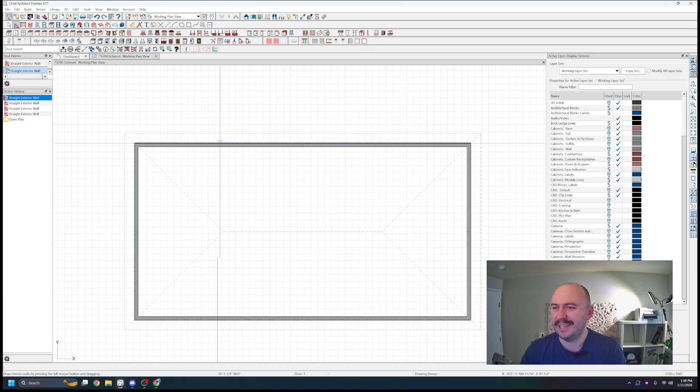First and foremost, I'm using Chief Architect Premier X17. We're not worried about the rest of the house, we're just focusing on the kitchen and living room that is directly adjacent.

Just getting in my walls. So here we have the kitchen. Let's place a couple windows for reference. We have our front door, front window, we have our garage door, and we're going to put this hallway in, more so for dimensions. We know the hallway, we can guess based on pictures how big things are.

So let's pull those reference images up. If I had to guess, I'd say this room is 12 feet across, maybe.

So we got a 36-inch front door with a couple inches on the right side. Looks like based on the 3-gang switch box there, that's about 24 inches between the door and the window. And I'd guess, it's hard to say, could be a 6-foot window, could be a 7-foot window. We're not trying to be perfect here. Of course, if we had perfect dimensions, that would be ideal, but since this is an on-the-fly design, we'll make some assumptions.

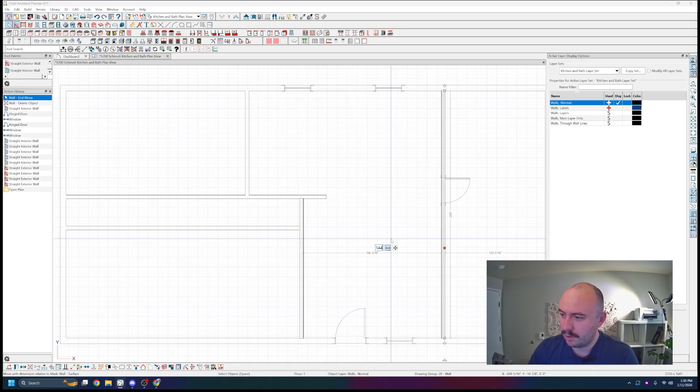Let's get this door over here in the corner, get the swing right. This 6-foot window, it's pretty dang close. I'm dragging our half wall. If I had to guess, it's 48 inches based on the tree, something like that. And I'm assuming that this door lines up with the hallway.

Okay, so we got our living room, we'll put our fireplace in there eventually. And now this kitchen area, well, let's go look at our pictures.

You can usually tell by the cabinet sizes roughly how big a space is, if they're standard cabinet sizes. This one might be a little bit different since it is older. If we're just guessing, 18, 18, 36, I'm going to guess that's a 24. There's 5 feet, 60, and that's roughly half the room. So yeah, 10 feet, we're just going to go with 10 feet.

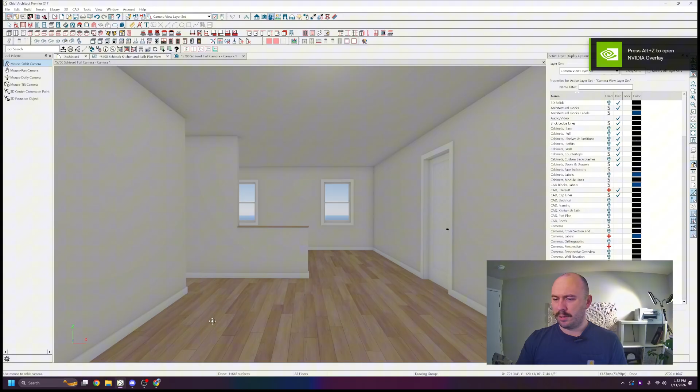Let's get a camera, see what we're working with so far. We'll pull up our reference images. Okay, so that garage door is technically in the kitchen dining room area. Easy fix.

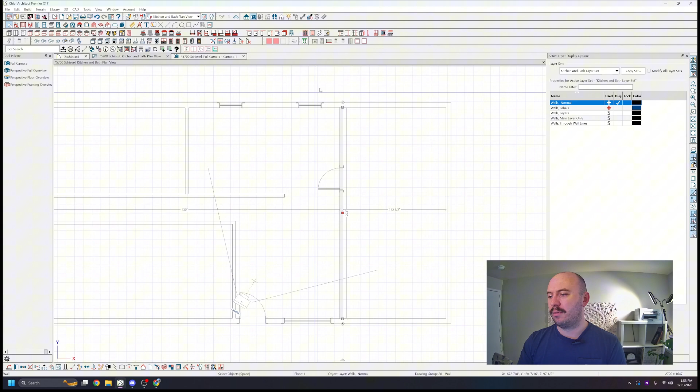What swing was that? And swing towards the living room. All right, looking good. That does seem a little bit smaller than, again, we're not being perfect. Something like that. I think the last thing is windows, and we can get to designing.

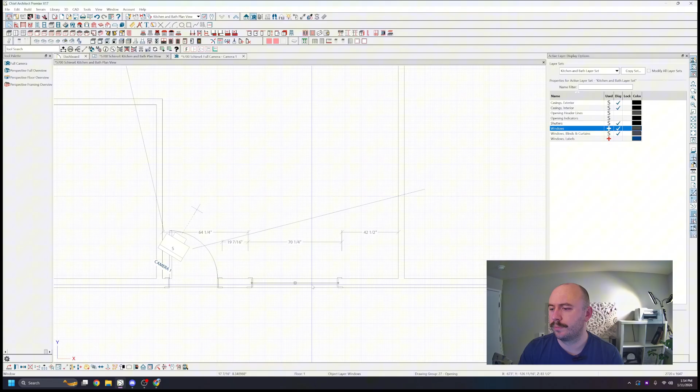Okay. 6 feet. And we'll use the right window type. See, we're just making things up. So it's 7'2", we'll just call it.

Wow, so based on the plug, the fridge goes right there at the end. Where's the range? Okay, so we got some real funkiness going on. Looks like the range goes right there in front of that cabinet, and the fridge goes here. So that severely limits your working area.

With the range right there, you really only got that much counter space there, and that much usable counter space right there on top of the dishwasher. So I imagine this kitchen wasn't very fun to cook in unless they had a rolling around island sort of deal. Either way, it's going to be better no matter what. Okay, yeah, there's the fan.

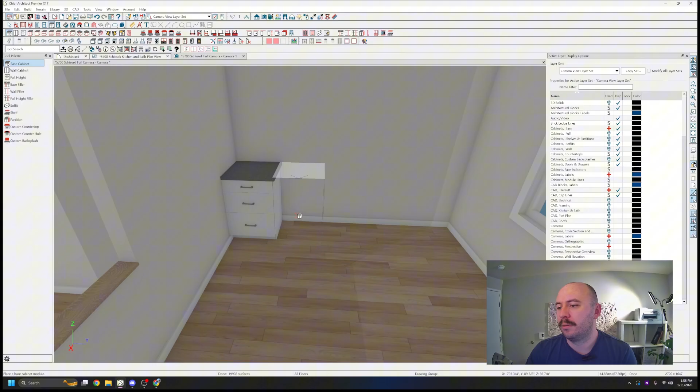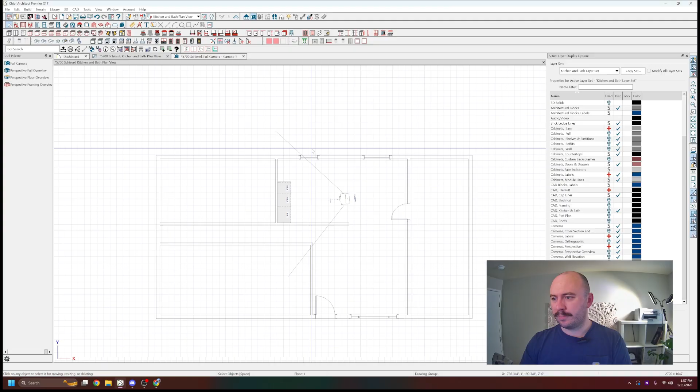Since we would be technically doing a sort of as-built, if this was a real client, which I'm somewhat treating it as for realism—somebody just bought this property, they can afford to put some money into the place and they're not trying to break the bank, but they do need a new kitchen right away. Anyway, if these were my clients and they just showed up, this is what I would be doing: creating a very basic as-built, just for reference, so that when I go to do my redesign, I have something to reference and my plumbing is in the right spot-ish, and all my appliances.

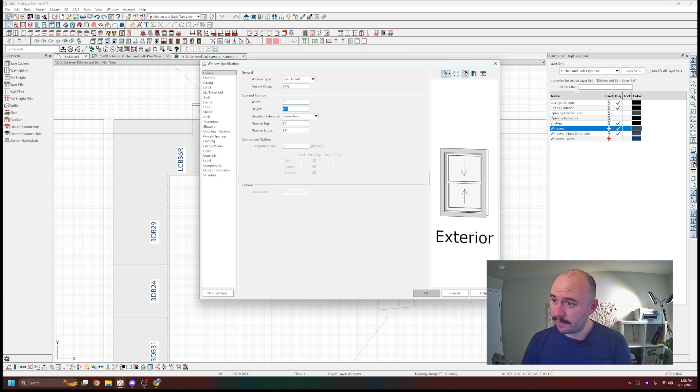This window is definitely not 48 high, it's probably 30 high, because we got the backsplash. So there's our sink, there's our dishwasher. I think there's one little 12 or 9 inch on the end for the fridge. Then we have our uppers, which is straight all the way across with one little there.

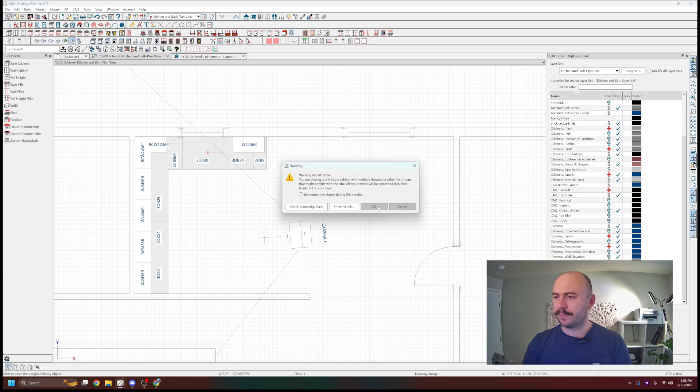Again, we're just basic for the as-built, we're not going fancy or anything. That sink symbol is much too big, I'm just going to throw in a basic symbol to represent the sink.

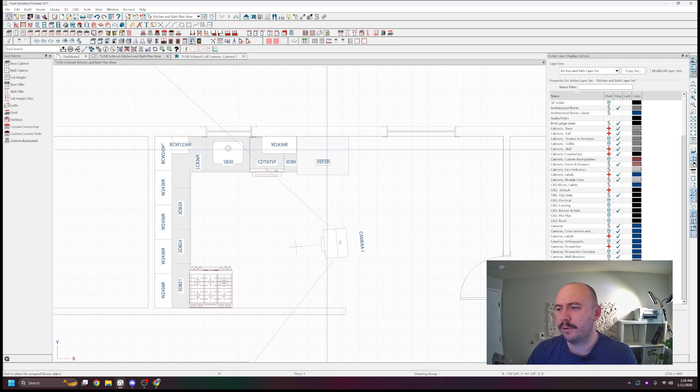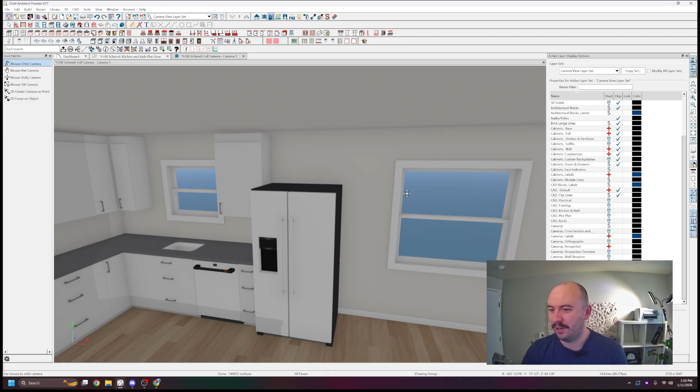And then theoretically, we would have our range right here and right there. So, non-functional. Interesting. Of course, this was functional at the time and it fit the space. I'm sure it served many great meals over the years, and there's nothing inherently wrong with it. It's just, it could be better, significantly better. That's what we're going to do.

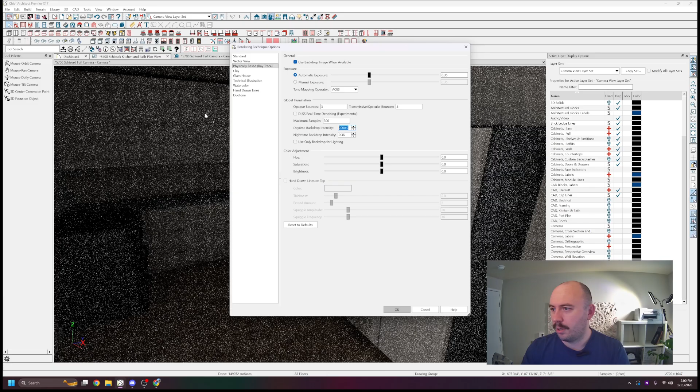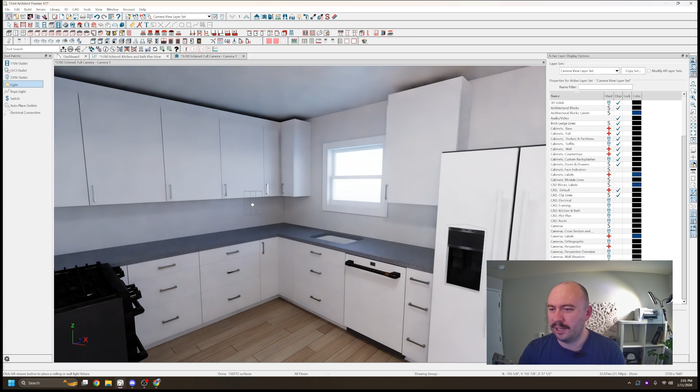So one more thing, this is a standard camera, it's what I do most of my editing in. I just want to show you guys really quick the power of the DLSS real-time denoising. So that does all the ray tracing without denoising, so you're not waiting for it to calculate all the light bounces. It just does it magically with NVIDIA's tools. I know my hinges are all messed up, I know that's not actually the color of any of this.

This is just for our as-built, we really only reference this like this in 2D. All right, so I have my very, very basic as-built done. If this were an actual client, I would spend more time dialing in everything, making sure my dimensions were exact after my on-site visit.

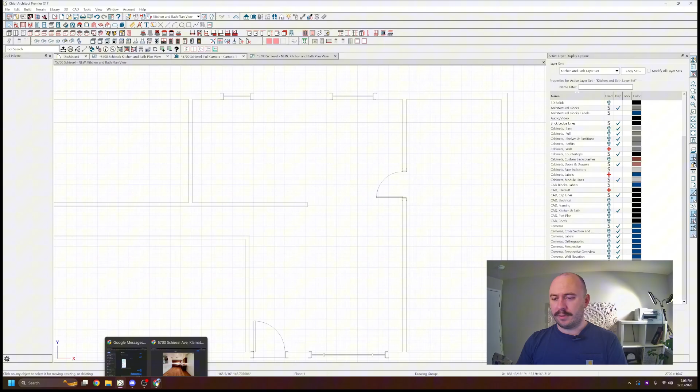This is just a copy of the one we just made, except now we can make changes. So let's get rid of all of that, and let's think about how we want to use this space. So current existing range was right here, I'd like to see if we can get it centered. Think about kitchens that are 10 feet wide, you can really only have cabinets on one side.

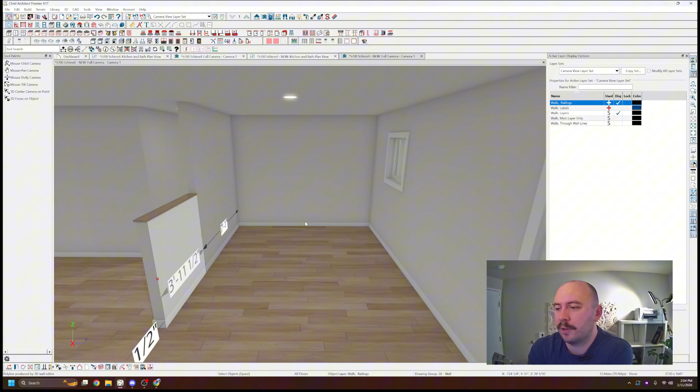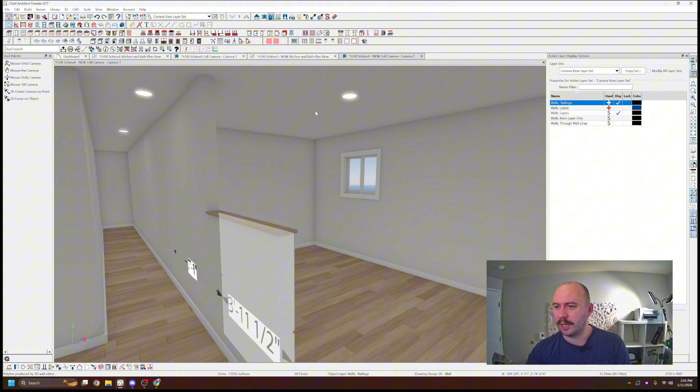This is actually a pretty common layout for a small rambler home. You have the front door, you walk right into the living room, there's a door directly to the garage, there's no mudroom or laundry room. This was very popular in my area, at least in the mid 80s, early 90s. So I've actually designed around this a few times.

And what we do most of the time, I'll take you back to plan view. So we have this wall. What I've done in the past, we'll get rid of this half wall, and then we'll take this all the way back and leave enough return so that we can hide cabinetry on the other side of here. Plus it's a nice place for switches since this is compromised by a door.

Just throw it in there. Just gonna do that. Anyway, so we have enough room for our cabinetry. I'm just going to throw in a base right there, and we really need just enough for the countertop return.

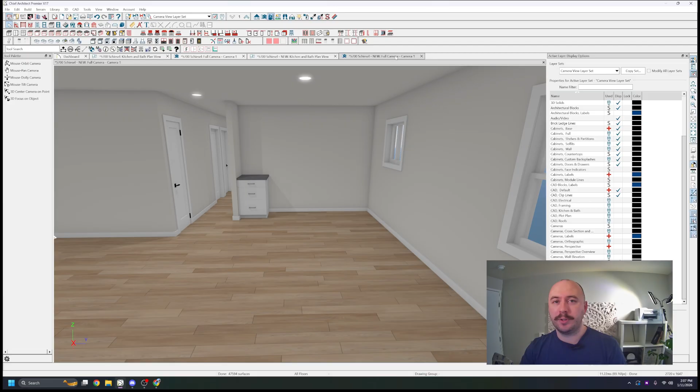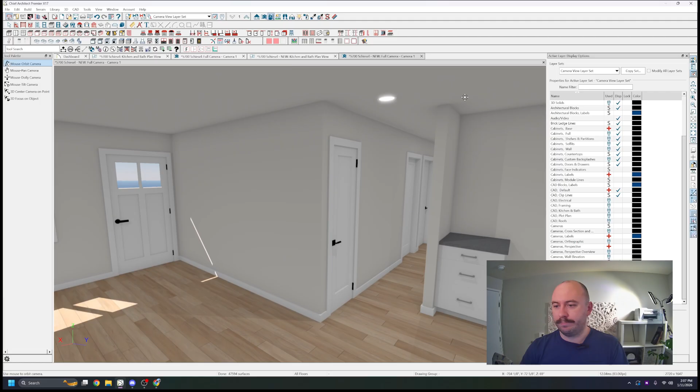And just so you know, I am using a 3D Connexion space mouse to move around. Before this, I used an Xbox controller, which works fantastic for navigating scenes, not so much for single-handed movement, obviously, but it is nice for getting the exact view you want without the keyboard and mouse controls. All right, so back to the design.

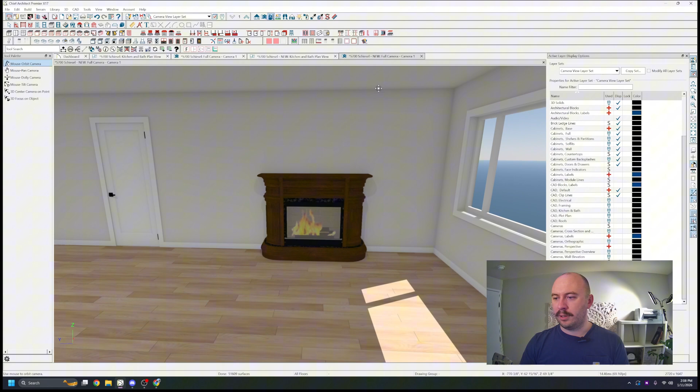We have a nice open space now, and I am going to throw in a fireplace just for reference. Maybe they upgrade the fireplace, we'll just use a pre-built one for now. So a nice open space with a fireplace. Again, very basic preliminary space planning stage.

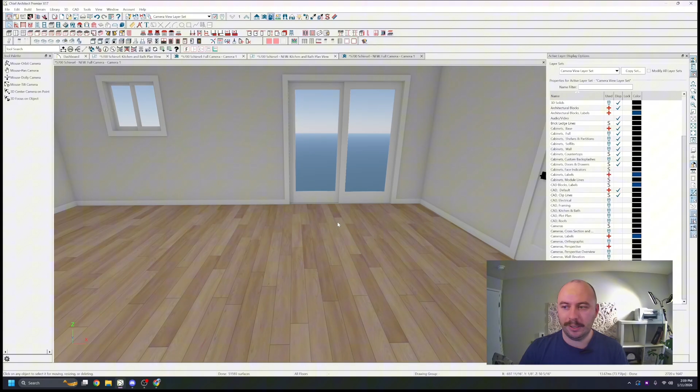And you know what, I'm gonna make the executive decision to throw in a sliding door so you have access to your patio. I know this does make it a traffic area, depending on how much you're using that space, but that's a nice access to the backyard. Plus, if you have kids, there you go, easy access - they don't have to go through the garage, through the man door, or out the front door and around that.

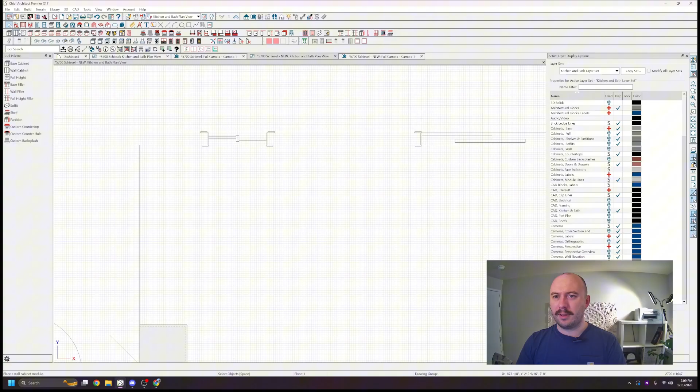But let's get our kitchen going, I'm going to place some cabinets. And again, another executive decision, I'm going to make this window nice and big. This is going to be at countertop height, so the sink is just going to flow right into the window.

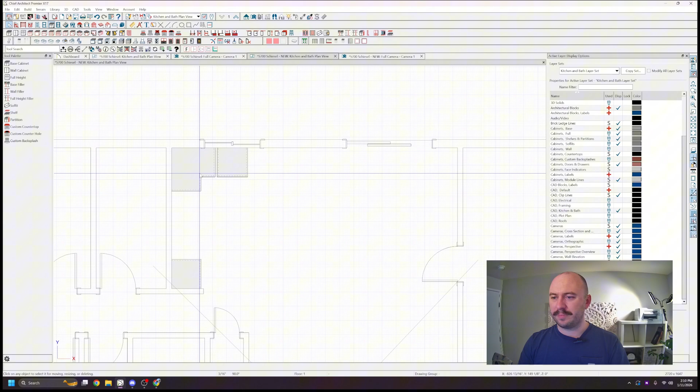And we want a functional Lazy Susan, I don't think they had one. Existing plans? Yeah, it's a blind corner, sink is right next to it.

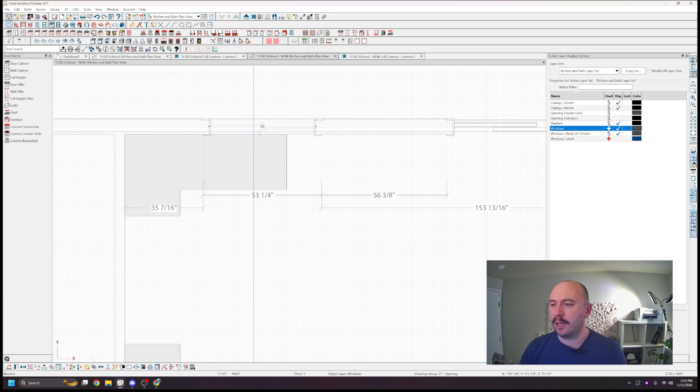So again, the nice part about making it up as we go: we're going to move this window over, keep our Lazy Susan, and do a nice big 36-inch sink base. It's okay to have it offset from the window because we have our dishwasher.

We're going to put the trash pull out in the island, right across from the sink, so you can scrape dishes and then immediately load them into the dishwasher. So we have our 18-inch trash pull out. And let's do a couple storage cabinets.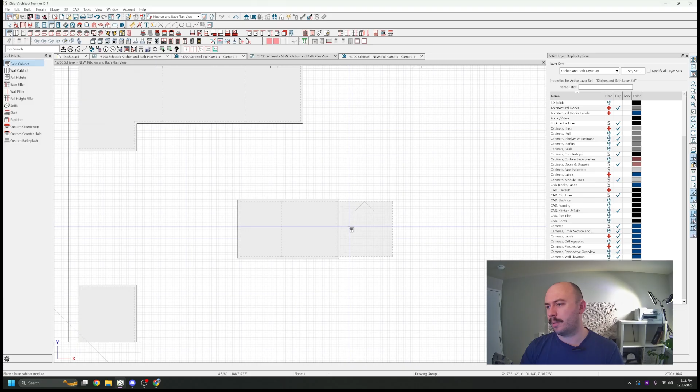We're going to do 12-inch on the back for extra storage, just like that. Now these are going to be full height doors on these back ones, with a 12-inch front overhang. So there's our island, and we have our trash pull out.

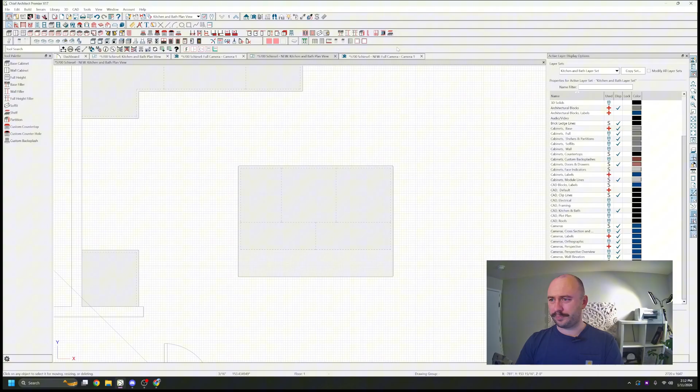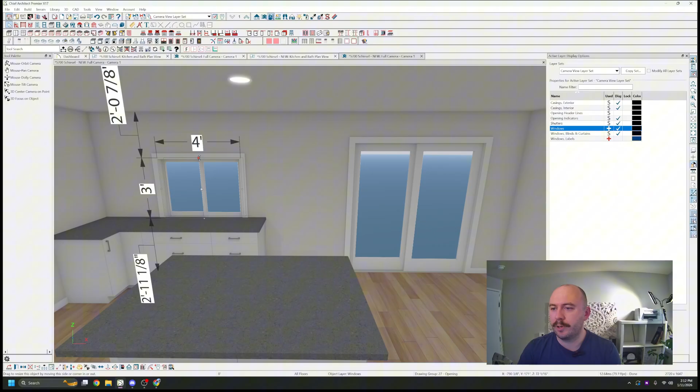Let's see what we got so far. Okay, storage, room for stools, if you want to entertain. I don't think I'd do another overhang on this side because that's interfering too much with the walkway and potentially a table. We still need room for the fridge right here. I'm going to drag this up to match the header on the slider.

All right, let's place our range. I do have all of the manufacturer catalogs available for appliances. I'll be using a GE convection gas. Sure, why not? We'll place that right there for now.

I have a feeling - in fact, why don't we just center this right now? So in Chief, you can use Control G.

Looks like we have room for a 9-inch spice pull out to the right. That'd be nice. Let's see. What do we have? 9 inches, perfect.

Let's duplicate that to the other side. I have copy and paste in place set up to B, and then reflect about is already set to R. So I just hit B and R, and that's how I quickly duplicate things and reflect them.

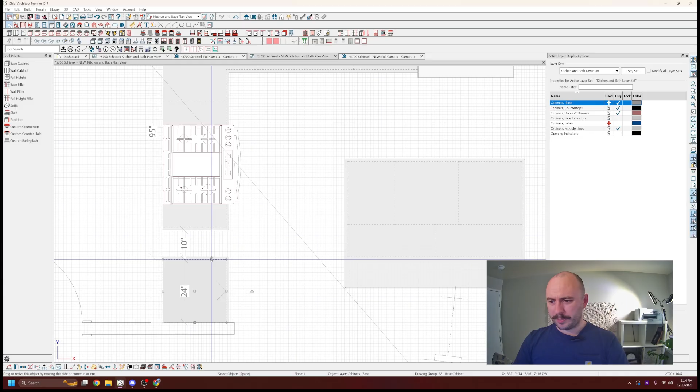All right, and how much space do we have left over here? 10 inches. We do need enough filler. Let's do a 2-inch filler. So that leaves us with 10 inches still, because that's dimensioning to the countertop.

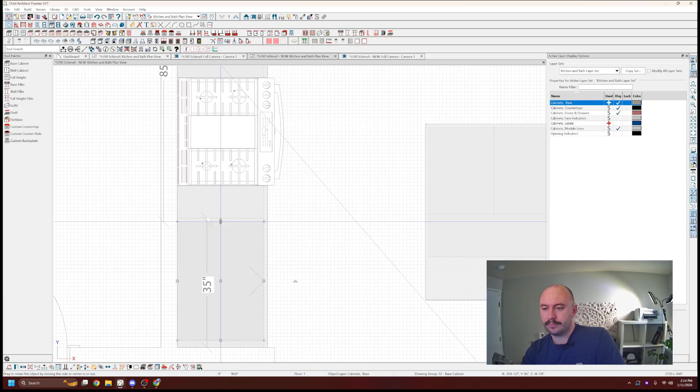So we could do a 35 custom. Let's see. Yeah, that's a 35 custom. Not ideal, but for symmetry, we're just going to make it work.

You can do a bigger filler, I guess. There we go. Now it's a 33, a standard size. You can get that off the shelf at Home Depot. I'm not recommending that in any way, but if you needed a cabinet, you could get a 33 easily.

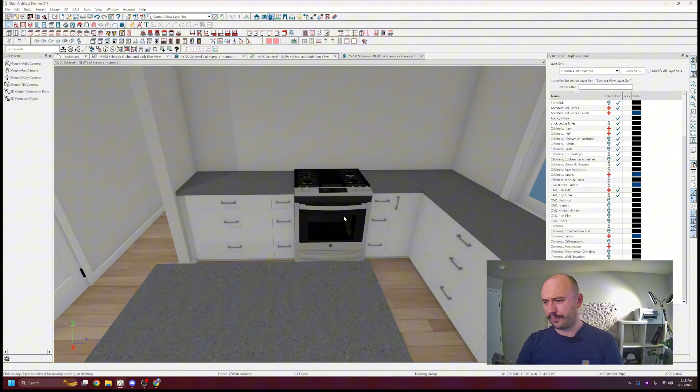And that's looking decent. Let's make these full height drawer pullouts for spices and utensils. Let's throw in a sink placeholder, and we are going to make this full height doors as well.

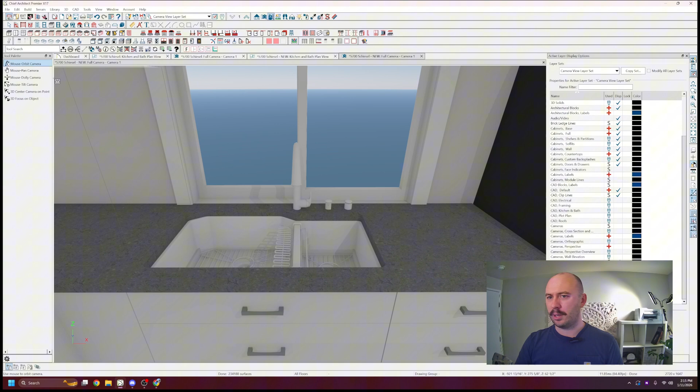There we go. Okay. And I would like to wrap this refrigerator. Pull this out. B and R to reflect about, and then we'll put a wall cabinet right there.

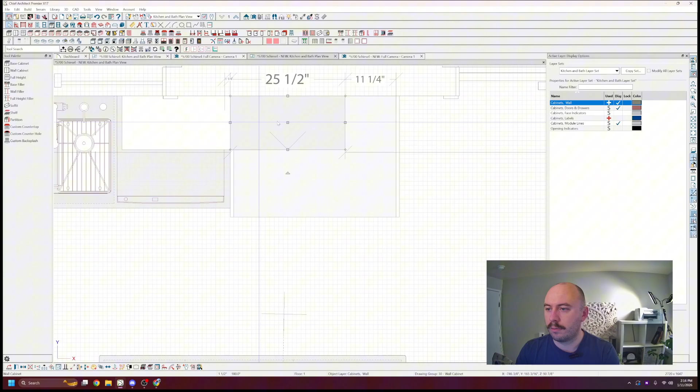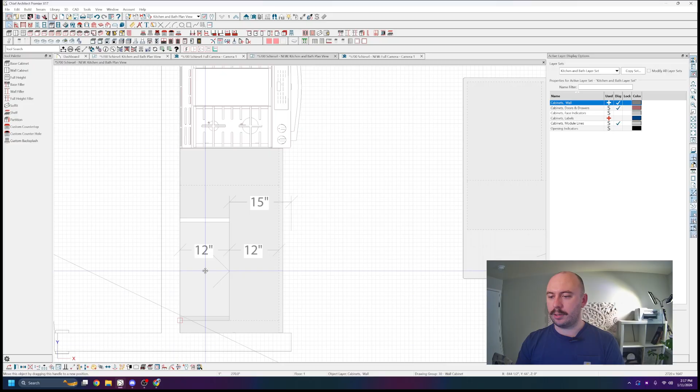Now, let's get the rest of our upper cabinets in. That obviously isn't going to work, and I don't like having a cabinet that close to a window. So we'll take our upper - let's see, 45. We'll split that.

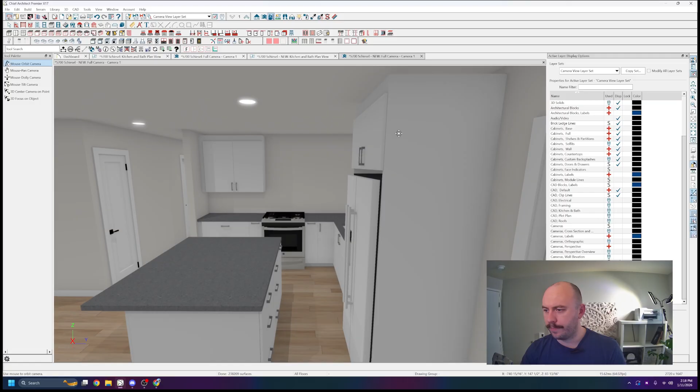We can do some of that. How's that looking? Better, I think. For space, a micro hood - I would hate to take up the counter space or throw it in a drawer across from the refrigerator. That doesn't seem like it'd be a great spot.

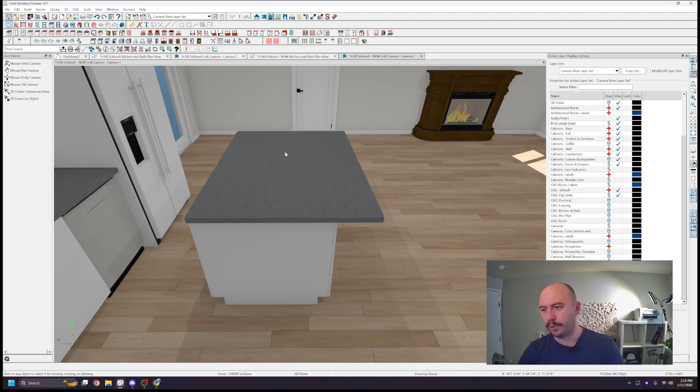And even then, I need to pull this island out because of our clearances. I'm just going to select the whole island, just drag it. That's better.

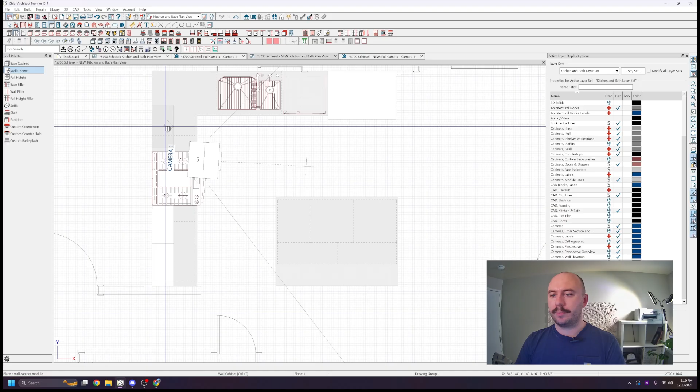I'd like to keep the countertop inside this if possible, just so that if people are sitting here and people are trying to get past, it's not a choke point. So the uppers, let's see what we can do. I wonder if we can just copy and paste these. Yep. Okay, let's get our range hood, our micro hood in.

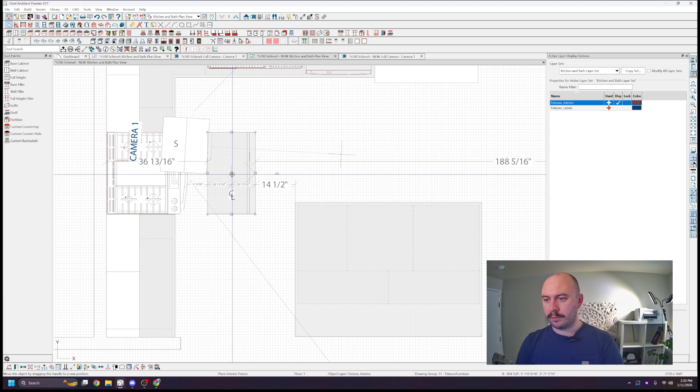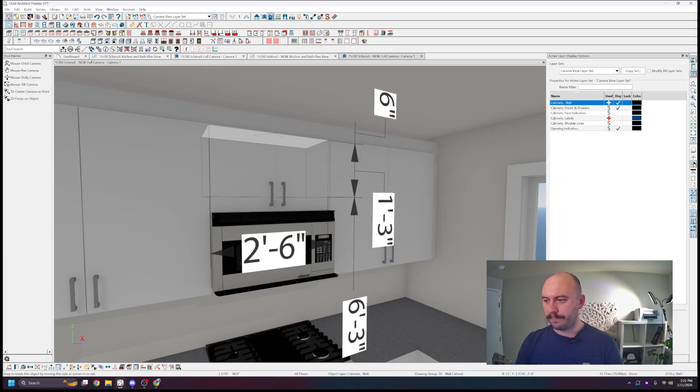Our micro hood right there. Just like that, a little bit more. It's nice to have that extra space, and having the microwave too low is a bad choice.

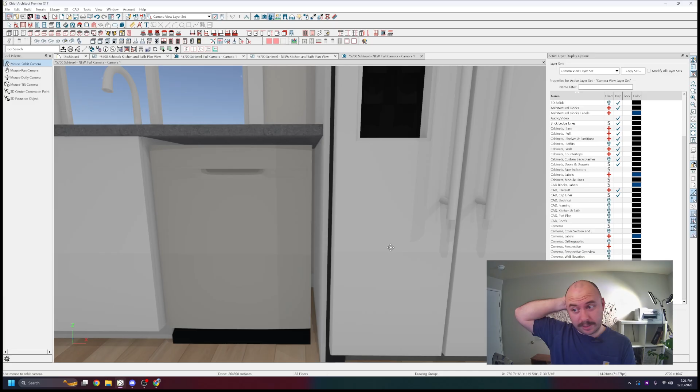I'm not loving this automatic dishwasher tool in X17. It leaves a lot of blank space. It doesn't really work as good as the old solution, but we'll leave it for now.

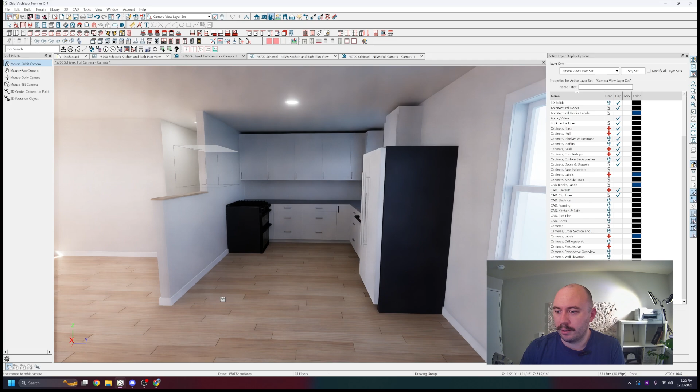I'd say that's a much more functional kitchen than what was existing. You get access to outside, which is great, much more natural light from the window, and an island. Plus two access ways to the kitchen, really—you're not stuck going in just one direction.

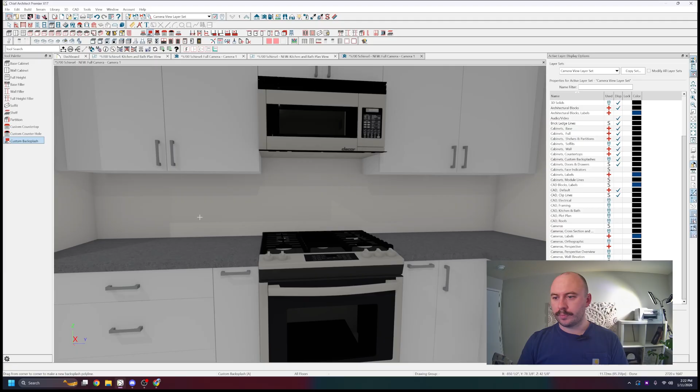All right, well, let's make it pretty. Add some backsplash and pick out our door style and cabinet finish. So I'm just using the custom backsplash tool—click the wall, gives me backsplash across the whole thing. Same over here, except we will drag this down.

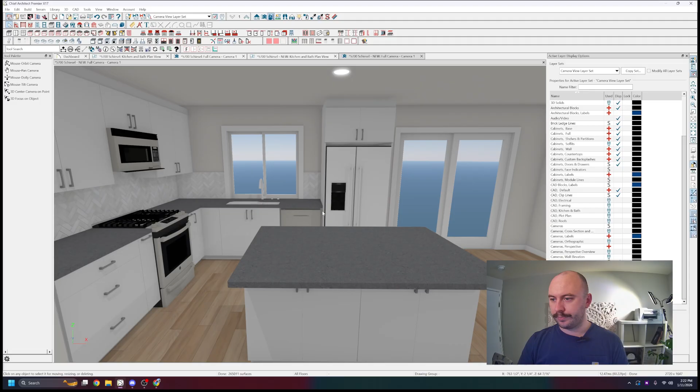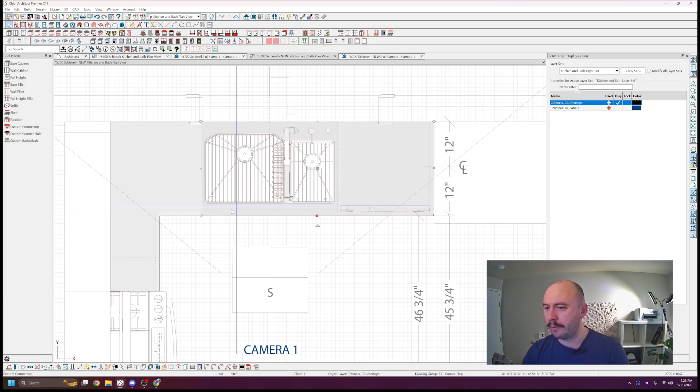All right, looking pretty good. And I would have this countertop continue into the windowsill. That's an easy fix—I'm just gonna select this, generate a custom countertop. So now the countertop over the kitchen sink and the dishwasher is editable. Just gonna drag that to the center there. Let's see—very nice.

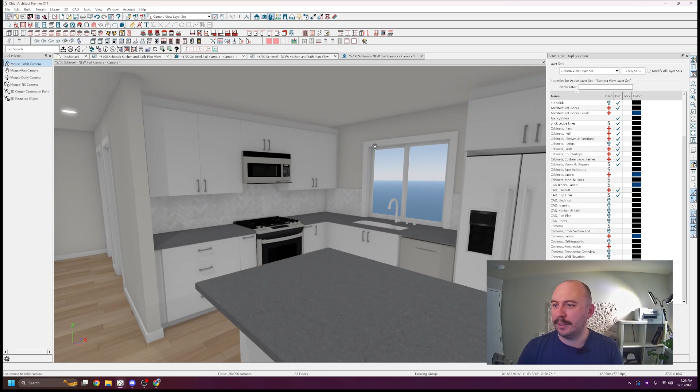Of course, this flooring would need to be ripped up, and I'm not sure how savable the existing hardwood flooring is. But you know, that's a nice fireplace—you could put a gas insert in there. New windows—the house needs a lot, but it could be very cute.

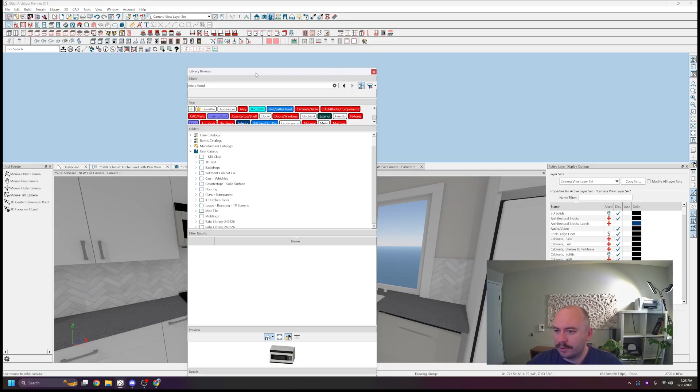Okay, let's get some tile in here. I'll show you my library browser. All right, so in my user catalog, let's see what I have in mosaics—pinwheel, diamond, chevron, herringbone. I am a fan of this herringbone.

I'm not sure if it's going to fit exactly with the style. I guess we can always come back to the backsplash. Ooh, some nice neutral scales.

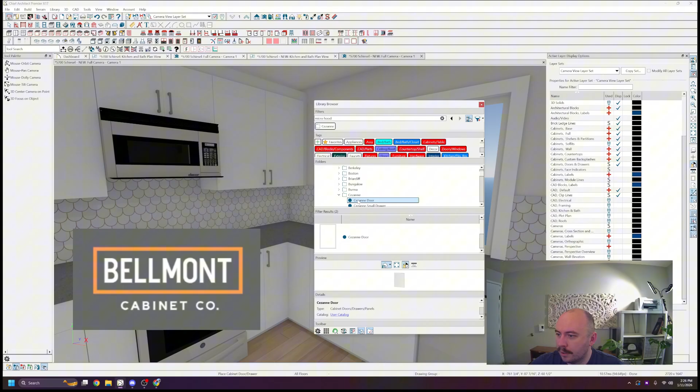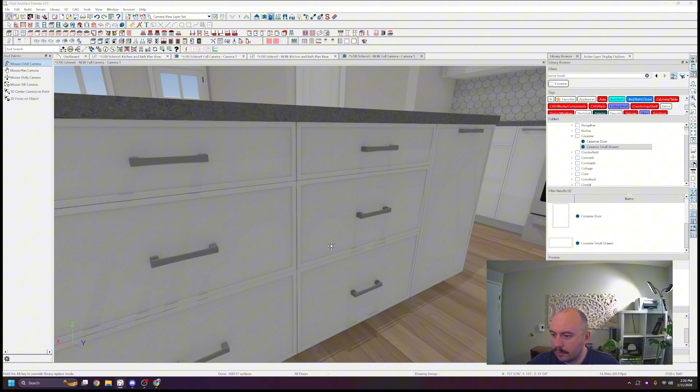As far as cabinetry goes, I'm going to use the Cezanne door. We'll just swap these doors out and some drawers. Swapped out the doors as well. That makes it easy.

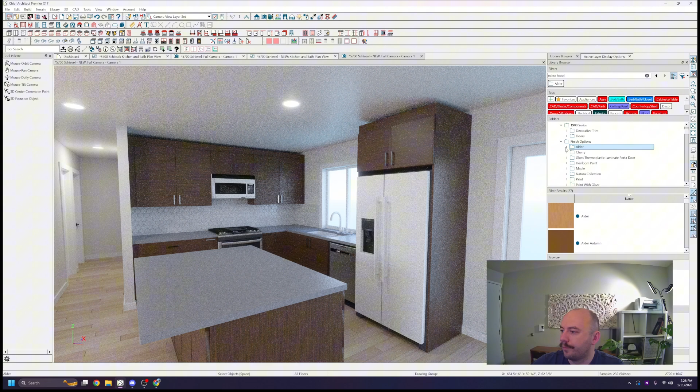I'm not sure about the functionality of these doors, but let's get these painted up. When I say painted, I mean stained. I don't know, that might be too dark—let's try an alder. Yeah, we'll do peppercorn. That's still dark, but I really like it. I think we can work with that.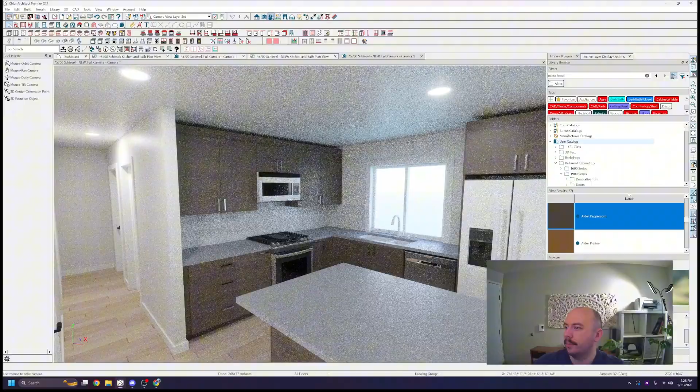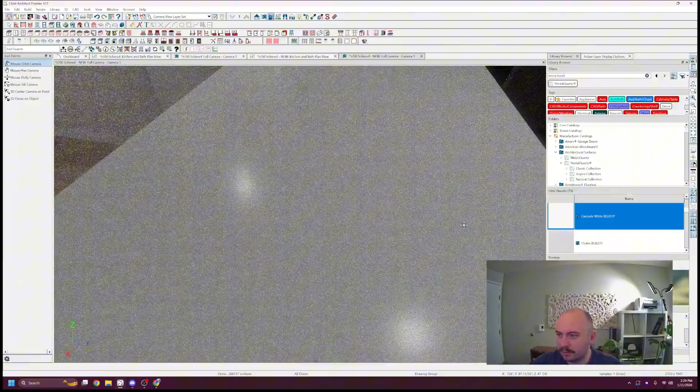All right, let's get our countertop figured out. I'm going to use the Architectural Surfaces Pental catalog—use a Pental Cascade White. Just a little bit of detail, no major veining or anything.

And you know what, we're just going to do the backsplash too—that keeps it simple. Nice clean look. The white will be incredibly hard to keep clean, but that's not my problem.

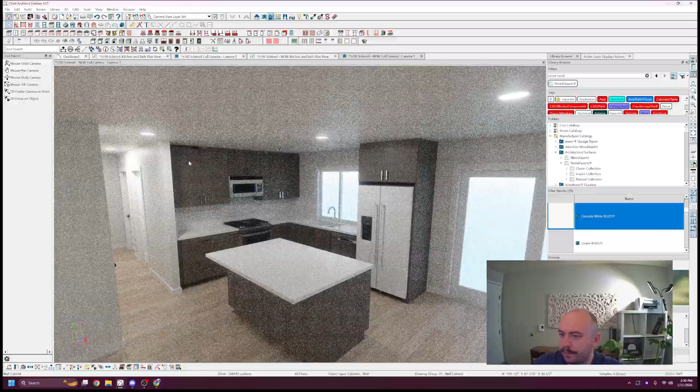Let's see, let's get these uppers just a little bit higher—do 39 uppers, get a little bit more space. All right, we're looking good. Let's see.

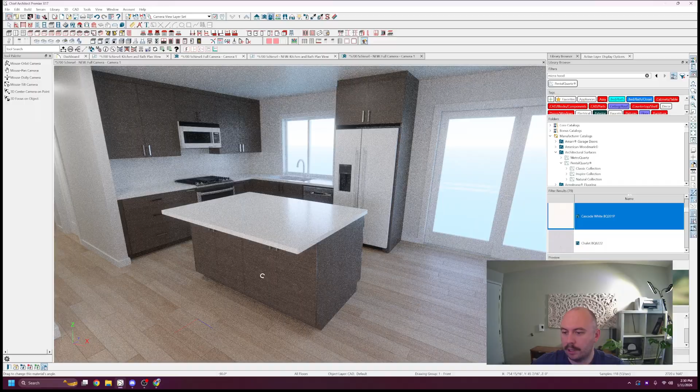Let's change the orientation of the floor—realistically it would not go front to back like that, it would go lengthwise. Yeah, looking pretty good. Mess around with the finishes while we're here.

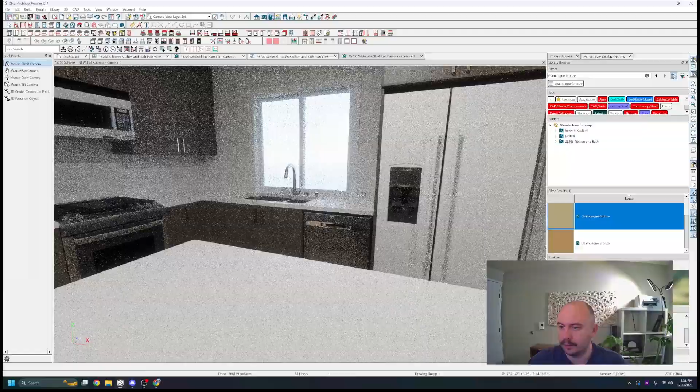See if a champagne bronze—that looks pretty sharp. We're cooking. Let's get these finishes the same.

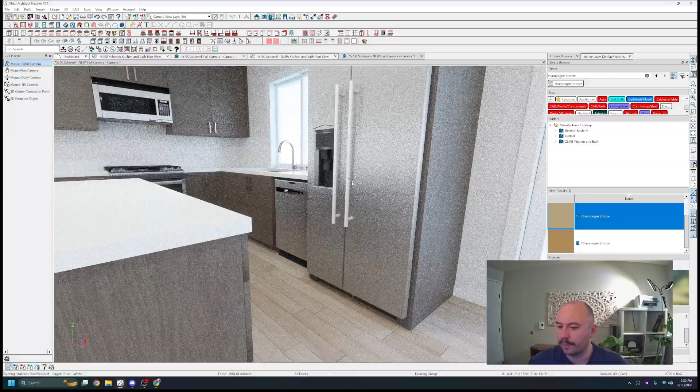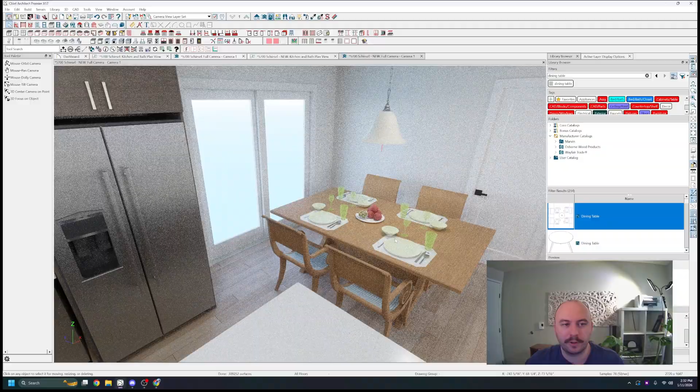Looking good, could get some. Let's get a dining table. Okay, that's tight—you could get away with a smaller one for sure. Maybe a circle table. Yeah, something like that, that's better.

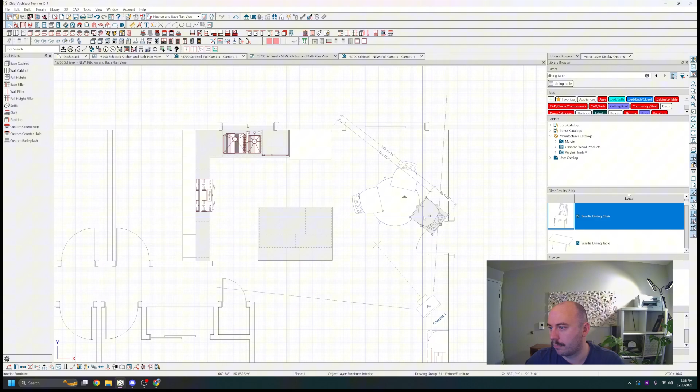Throw a couple chairs in. Chairs are always easiest to place in plan view for whatever reason. Just going to put three chairs—a little bit of clashing wood tones. In fact, why don't we just paint that the same? There we go. We got a nice pop of color in the seat cushions.

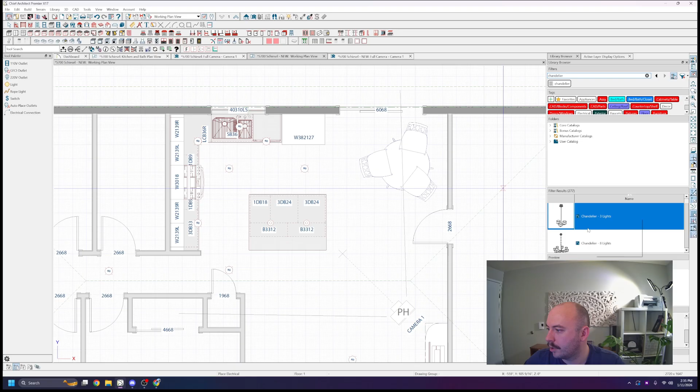And let's finish up our lighting. We can get a couple pendants over the island. I'll just use, let's see, a basic glass pendant. That's better—go a few more. Let's get a small chandelier over the kitchen table. Something like that.

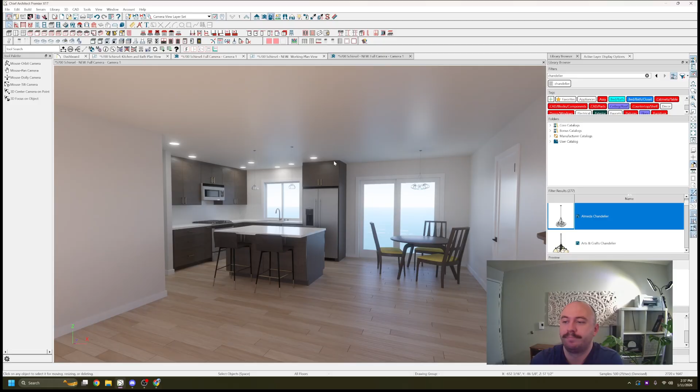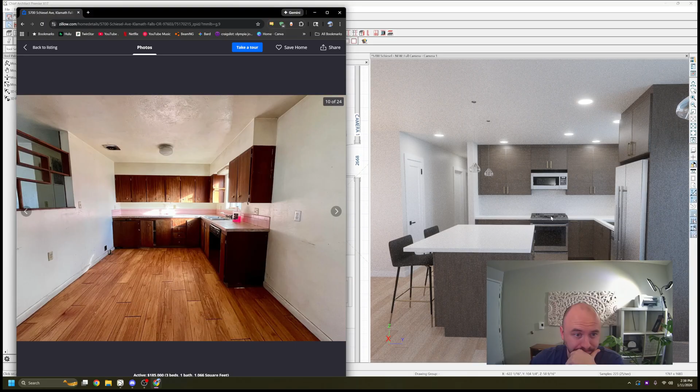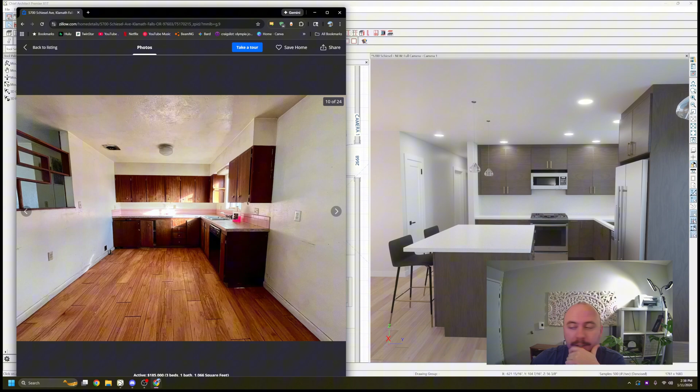I get a lot of satisfaction transforming a space that doesn't work well into something that does. And I think this would really, well, let's just pull up the original. Yeah, a little different—a lot more usable space for sure, a lot more storage, and yeah, a lot more functionality. I hope you enjoyed, and I look forward to the next one.